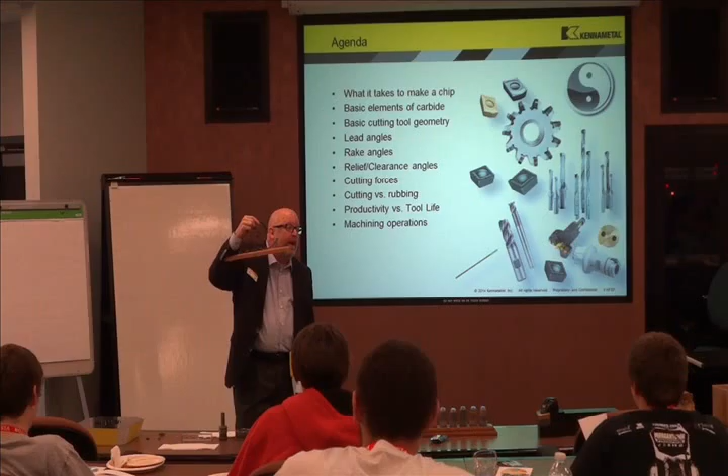I ask a lot of questions, okay? I do expect answers. If you answer, you will get a football. If you ask a question, you may get a football. If you ask a stupid question, you'll get a football. There are no such things as stupid questions, right? The only stupid question is the one that goes unasked. So I want you to ask questions. You may get a football if you answer a question. You will get a football if you fall asleep, right between the eyes. All right?

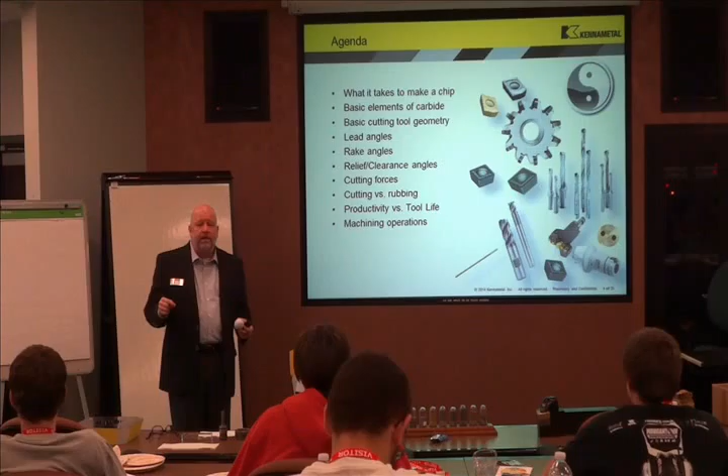The answers to all the questions are typically in your book or on the board. As I said, we're not actually following that agenda—that agenda is for our 2-day program. We're going to go through the first presentation and the second to last presentation today, because we just don't have enough time to go through both of them. So let's take a look at it.

We're going to take a look at what it takes to make a chip. As I said before, our customers make parts—you make parts, right? I could care less about your part. What I really truly care about is making good chips, and I want to make good chips, and I want to make a lot of them.

Because if I'm making good chips, I'm making a lot of them. Not only am I making good parts and a lot of them, I'm probably making money, which is important to all of us. We're going to talk about the basic elements in carbide. Carbide is the primary cutting tool. Are you guys using carbide or high-speed steel? Both.

Okay, we're going to talk primarily about carbide because carbide is what's being used primarily in industry today. We're going to talk about basic cutting tool geometry. The reason we talk about carbide and basic cutting tool geometry is because you need to understand how the cutting tool cuts.

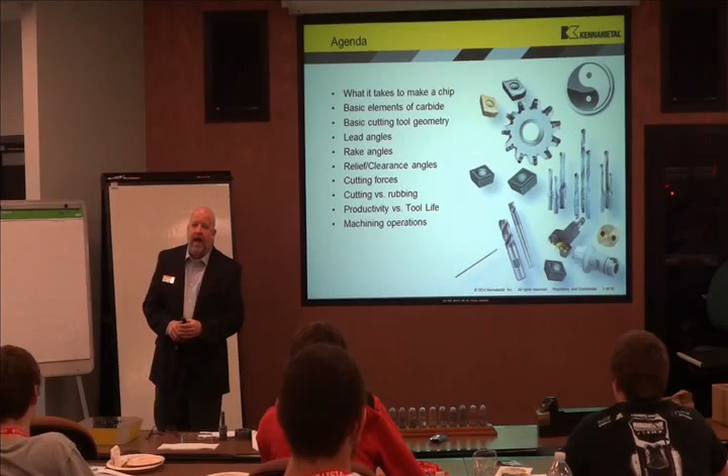Right now you're learning the fundamentals of machining. Pretty soon, are you learning programming as well? Yeah. It's okay to know programming, it's okay to learn how the machine works, but at the end of the day you've got to understand what's really happening where the rubber hits the road, or where the cutting tool hits the steel. And that's what we teach. The reason why we teach it, to get back to your question, is you can't learn this anywhere else. They don't teach it as much in tech school, they don't teach it in the 4-year engineering schools. That's why it's up to us to do it.

We're going to talk about cutting tool angles—lead, rake, and relief. We're going to talk about cutting forces.

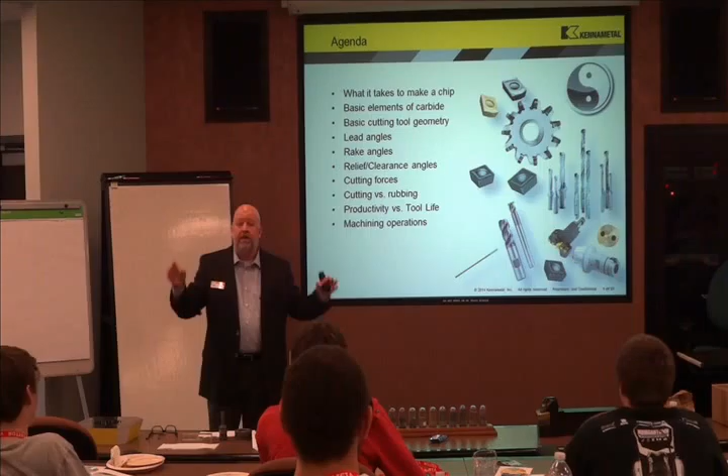How many of you remember Star Wars? At all. What did Obi-Wan tell Luke to do with the Force? Use the Force. Here's the truth: when you're cutting metal, there's going to be cutting forces. They're not going to go away. What we want you to know is how to use that force to your advantage.

Last but not least, we're going to talk about cutting versus rubbing. We're going to talk about productivity versus tool life. And then we're going to talk about basic machining operations.

Now, when you look at these pictures on the right hand of that slide, which one do you think does not belong? Go ahead. The yin and yang? Oh, I missed—that was a horrible throw. Hey, watch it. Okay, he got it.

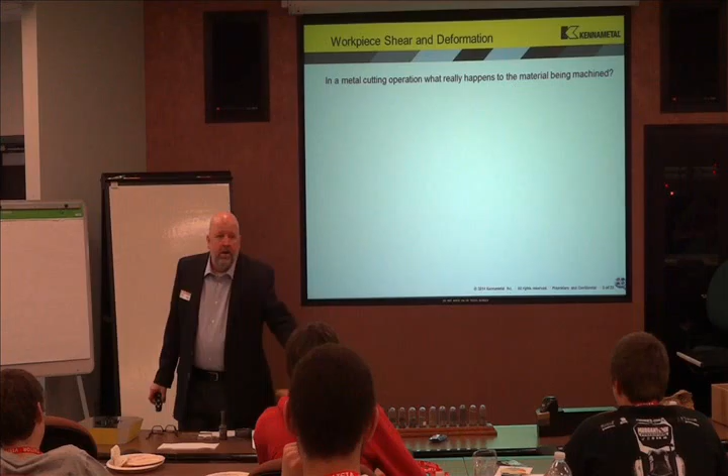The yin and yang—why do you think it does? What does yin and yang stand for? Does anybody know? Balance. It's actually yin and yang is good and evil, it's the balance. The symbol of yin and yang up here in the corner is the symbol of the balance of good and evil. And when you take a look at machining, the reason I have that up there is because in machining, it is always a balance between good and evil.

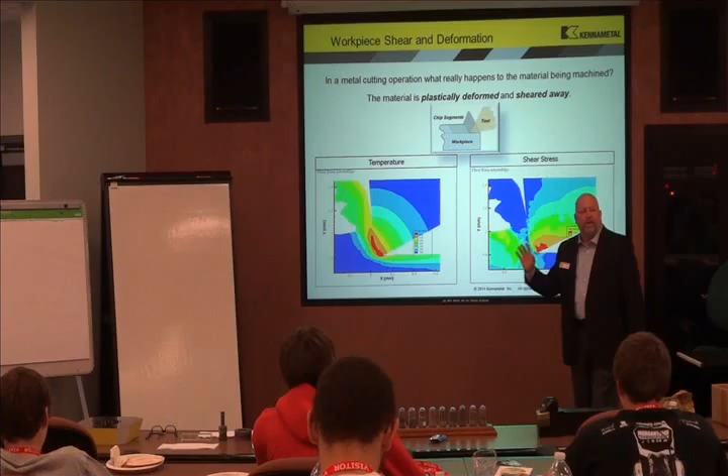If I change my edge prep on my cutting tool, there's a good thing and a bad thing. If I change my lead angle, there's a good thing and a bad thing. If I change the carbide grade that I'm using, there's a good thing and a bad thing. It's incumbent upon you to figure out what the good things and the bad things are, because that's part of what you're going to do when you troubleshoot machining operations as you get out into the real world. So in reality, this is the most important thing.

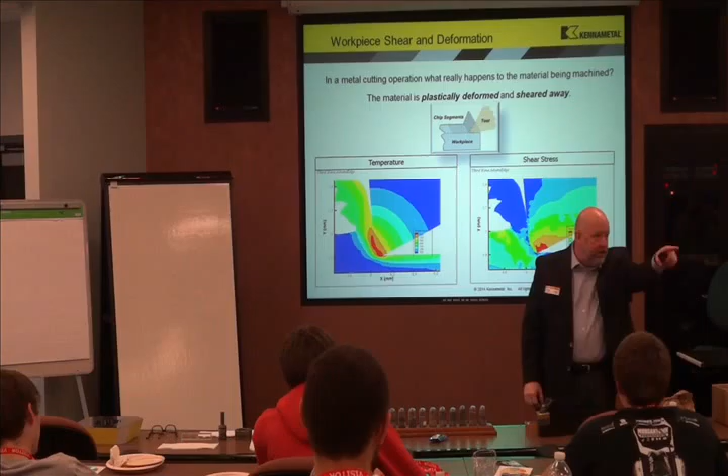Before we get started, it's important to understand, in a metal cutting operation, what's really happening to the metal being cut? What's really happening to the metal being machined?

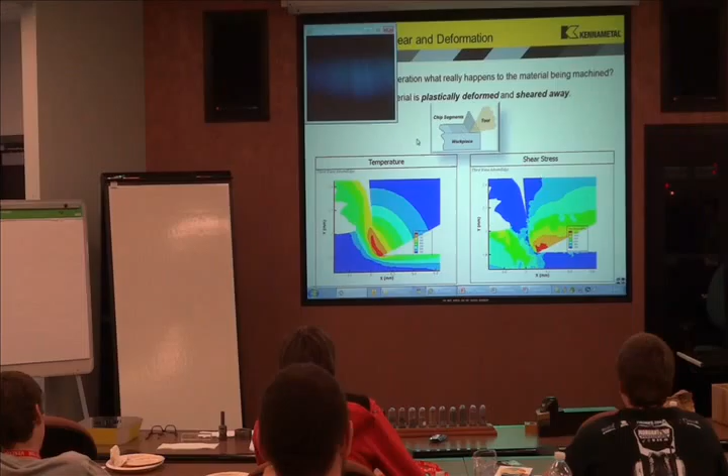Anybody know? By the way, the answer is in your book. They teach them to read at that school. They don't? Okay, just text. You know how to text, right? You can text me the answer, right?

In a metal cutting operation, what's really happening to the material being machined is it's being plastically deformed. Sheared away is one part of it. But to make this chip, we must first plasticize the material, and then we shear it away. At the shear zone, where the cutting tool hits the metal, it is 1200 to 1400 degrees Fahrenheit.

How many of you knew that? So what we're actually doing is plasticizing the steel, and then by the feed force, we push it away and shear it away. That's what's really happening. This is my cutting tool, this is my chip, this is my part. Right here where the cutting tool hits the part, that's 1400 degrees Fahrenheit.

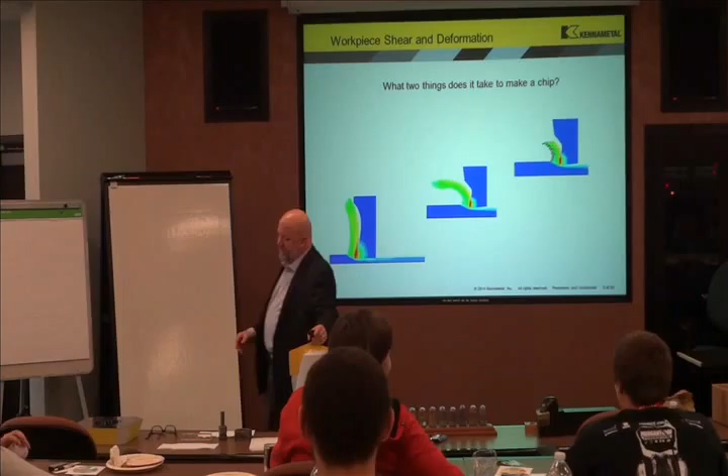Pass this around. When you look at the outside of this chip, that's the side rubbing what I call the rake face of the cutting tool, and we'll talk about that. The inside of the chip you see is undulating. See the bottom of this chip coming off? If you look at it, see how there are segments, those lines? That's really what's happening.

That's sharp, just be careful guys. Yeah, don't cut yourself. Yeah, you could cut yourself. I would prefer you carry it by the wood.

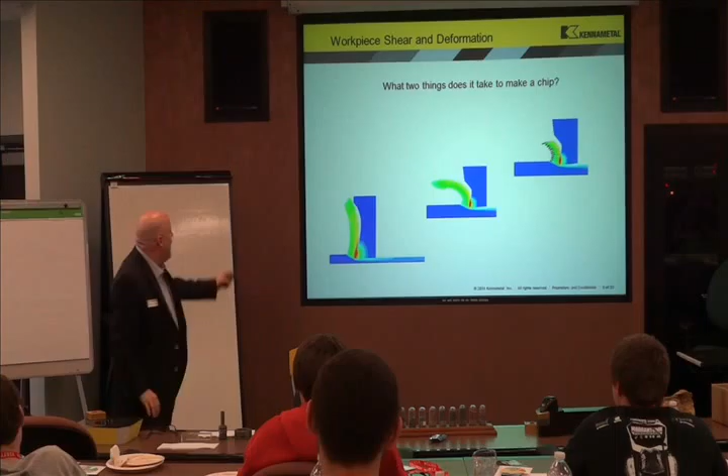So, in a metal cutting operation, we're plastically deforming and shearing away the material. How many of you like butter? Seriously, I like butter, you can tell, can't you? Now, when you take butter...

I'm not sure I like your answer. All right, yes, I do like butter. My doctor doesn't like it, but I do.

When you take the butter out of the refrigerator, is it easy to cut and put on toast? No, it's not, it takes a lot of force, right? And when you try putting it on your bread, it rips up the bread. I don't keep my butter in the refrigerator, I keep it in the cupboard. I take my knife out and cut it, it cuts real easy, doesn't it? It makes it easy for me to eat more.

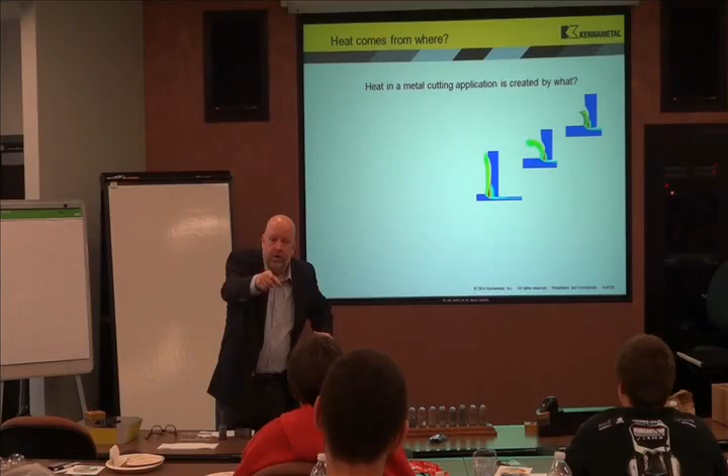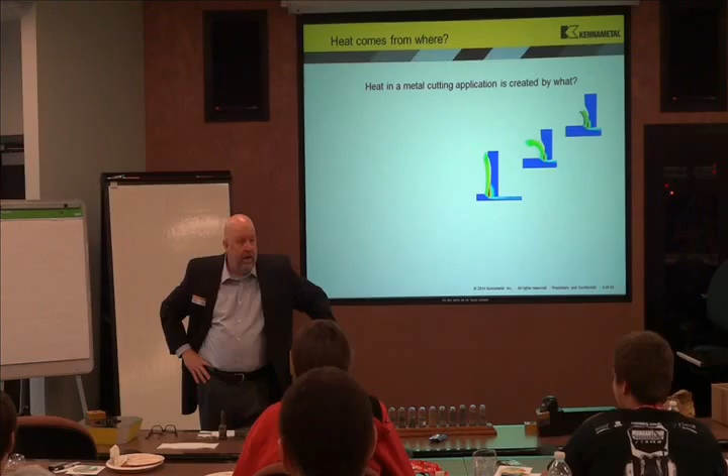Same thing's happening to the tool. Think about it. If I don't have enough heat at the shear zone, it's going to take more force or pressure. If I have too much heat at the shear zone, what do you think is going to happen? Not only the part, what else is it going to melt? My cutting tool. So what two things, if I'm plastically deforming it and shearing it away, does it take to make a chip? Heat and pressure. It takes heat and pressure at the shear zone.

Now, how do I create the heat? It's friction. If you hold your hands together and rub them, what happens? You start getting temperature, it starts getting warm. So how do I create that friction? Well, the tool's running across this part, but think about it: the rotation of the tool or the rotation of the part, depending on whether I'm turning or milling.

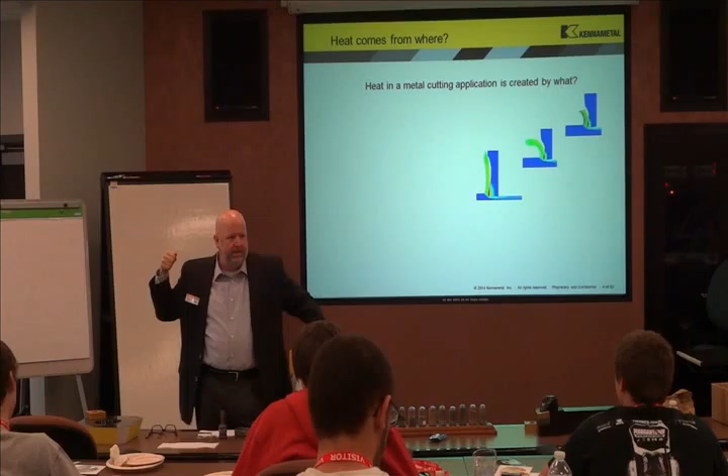Make sense? Now, how do I regulate the amount of heat? Because remember, the amount of heat I create at the shear zone is just like Goldilocks and the Three Bears, you have to have surface footage, and it has to be the right surface footage. How many of you really don't understand surface footage? How many of you, all of you, understand surface footage? Really? There are teachers in here, they can't see.

No, that's right. How many of you use toilet paper? How many of you use toilet paper? You're not going to raise your hand?

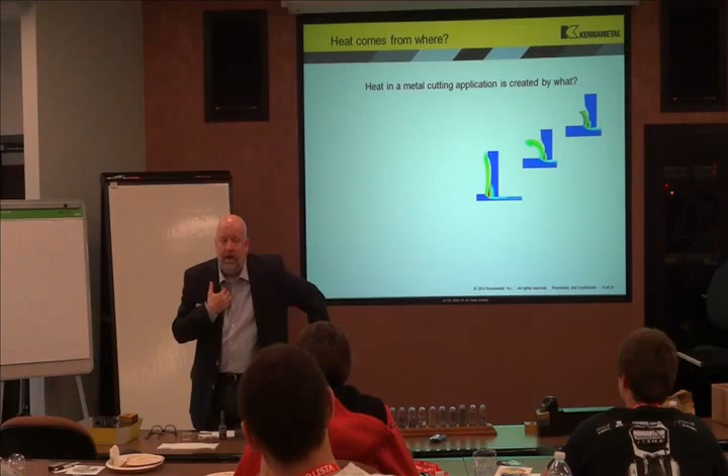All right, here's the best way if you're ever trying to explain surface footage. Think about it: if I had a small roll of toilet paper and a big roll of toilet paper, your teacher back there is holding it on a broom handle. If I walked 100 feet in 1 minute, what was the surface feet of both rolls? The small one and the big one?

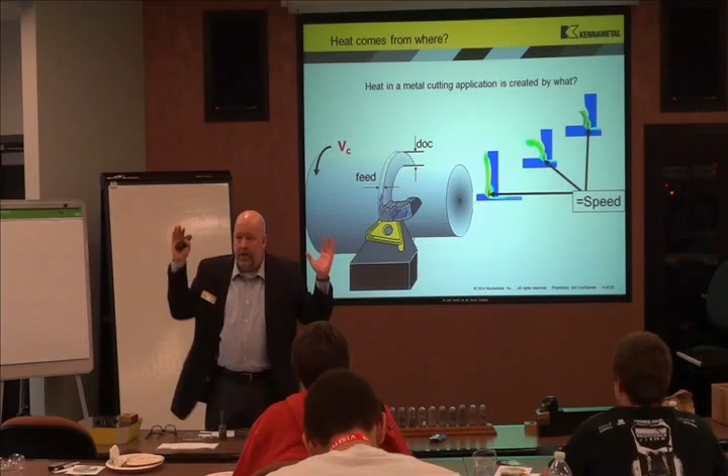100 feet. Were they doing the same RPM? No. Which one was going faster, the smaller or big one? Smaller. Why? Because it had a smaller circumference, and it had to go faster to get the same surface ripped off of it. It's all about having the same amount of material crossing your cutting tool in a fixed amount of time. That is how we regulate the heat.

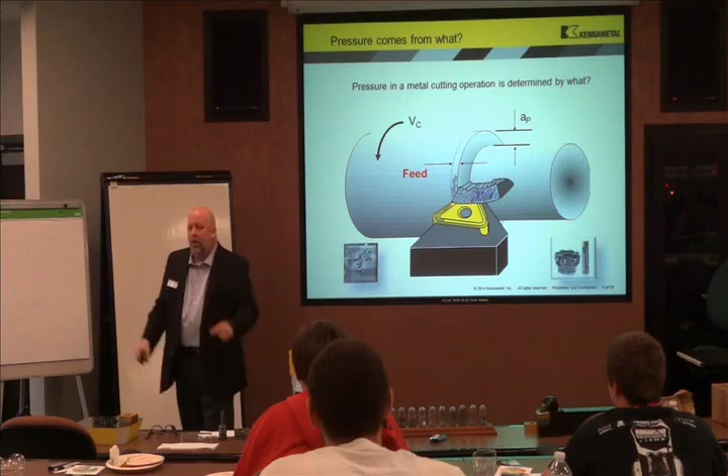Do you run the same speed, surface feet per minute, for all materials? No. For every material, there's a thing called a machinability rating. It's more complicated than what I'm going to say, but to me, what that machinability rating means is the amount of heat and pressure it takes at the shear zone to plastically deform and shear away that chip. That's really what it's all about.

Make sense? All right, so a lot of times in industry you won't see surface speed, you'll see velocity cutting. Because in the United States, it's surface feet. In Europe, and honestly in America today, there's a lot of European manufacturers, a lot of people are using metrics on all their prints and all their programs. So you have to start learning both.

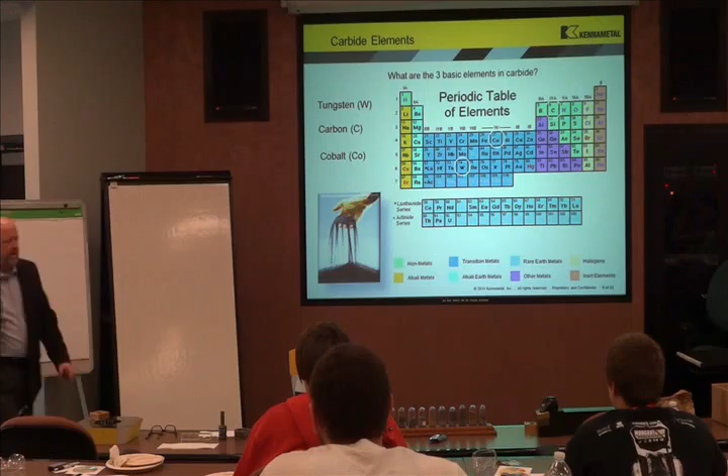So we regulate the heat by the speed. How do we regulate the pressure? By the feed rate. It's all about the feed rate. And that's either in inches per minute in milling, or inches per revolution in turning.

How many of you remember this? Who was laughing? You don't like it. I hate it, I hated it too.

Now I teach it. This is why I went into tech school instead of onto the chemistry track. You got one, right? All right, this is the periodic chart of elements, and the reason we show that is there are three basic elements that make up carbide. What are they? Cobalt is one of them. Tungsten's another one, and carbon's one of them. So you've got carbon, cobalt, and tungsten.

Now, hold on, if it's on the floor. Is it on the table? Oh, you did. When I think of carbide, what makes it up? I actually think Rice Krispie treats. How many of you like Rice Krispie treats?

All right, this is easy to understand with carbide. When you think about carbide, think about a Rice Krispie treat. Because what we do, there are two elements in carbide that we combine to make the Rice Krispie, or the hard wear-resistant molecule in carbide. What two elements do you think they are?

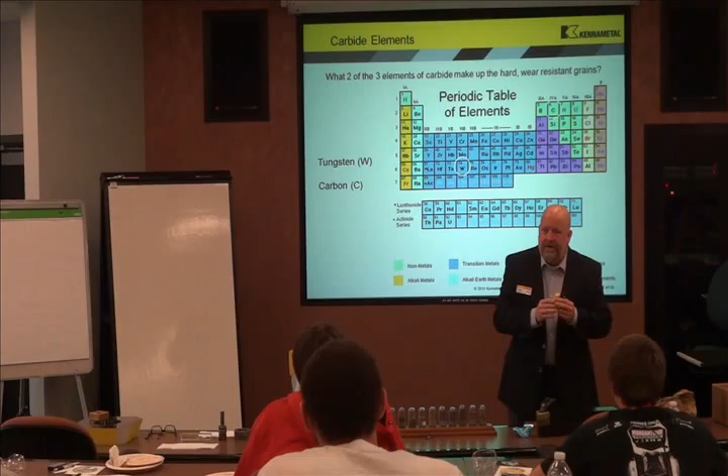He's getting all these right and he doesn't have his book open. Now he's stumped. What do you think they are? Tungsten and carbon. Think about carbon: what happens when you burn toast? It turns black. What is that black stuff? It's carbon. If any of you watched Star Trek in the old days, we are nothing more than carbon-based beings. If you burn me up, what am I going to turn into? Carbon. Everything in the world is made out of carbon.

Carbon, and then we take tungsten. We take carbon and tungsten comes out of this rock. Actually, if you look at that gray line going through this rock, that's tungsten, primarily mined in China. You ask why we manufacture there? Because we need their tungsten. It's a symbiotic relationship, right? Yin and yang.

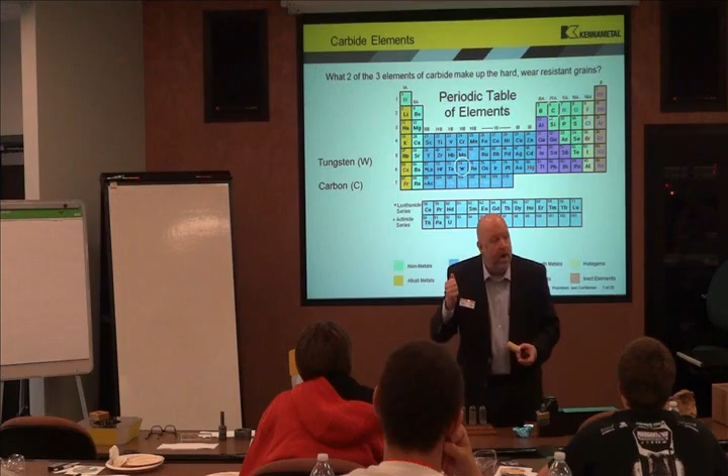So what happened to my Rice Krispie treat? So I take the carbon and I take the tungsten, I make the hard molecule, which is the Rice Krispie. It's the wear resistant part. Then I take cobalt, and another word for cobalt you're going to hear is binder. You will hear that as the years go on. It's called a binder, it holds everything together. It's the marshmallow.

Now, real quickly, there's two types of carbide: wear resistant and tough. You can't be both. Because if I'm really wear resistant, it's a hard piece of carbide. What's one of the hardest materials? Diamond. What's another hard material? Is glass hard?

It's right up there with diamond. Diamonds are a little bit harder. Now glass is very, very hard - the harder it is, the easier it breaks. It's also very, very fragile.

But if I took a cutting torch to a piece of glass, it would melt, but it would take a long time, right? So hard carbide is very, very wear resistant. It can take a lot of heat. But if I hit it with a hammer, it's going to break.

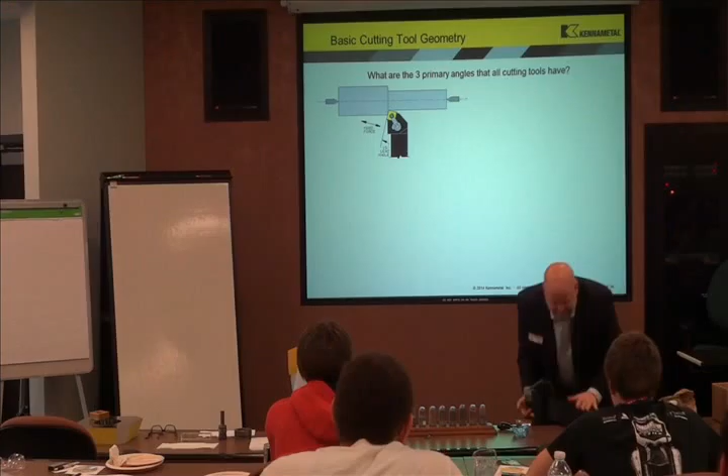So what do I add more of, Rice Krispies or marshmallow, to make it tougher? Marshmallow, or cobalt. You'll hear people say, I add more cobalt, I make bigger grains of Rice Krispie, I get a tougher grade of carbide.

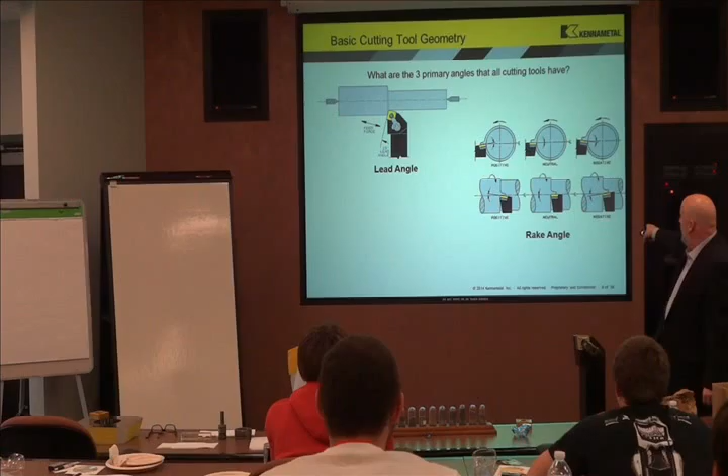When I say tough, I'm thinking about rubber. It can take a licking - interrupted cuts, a lot of vibration, a lot of movement in the tool. It's not hard, so it can't take a lot of heat, but it's very, very tough.

So tough carbide, you have to run slower. Hard carbide, you can run faster. You always want to run the hardest carbide grade you can without it breaking, because that means you can run as fast as you can, which is the most efficient.

It's all about how many parts can I put on the floor in a minute. That's all I care about. That's all your boss is going to care about, right? So that's the basic idea of carbide.

All right, now let's get into cutting tools. Every cutting tool, whether it be a drill, whether it be a turning tool, a milling cutter - and for some reason I have no milling cutters - no matter what kind of tool it is, a drill, a mill, a milling cutter, a reamer, doesn't matter, all cutting tools have three angles.

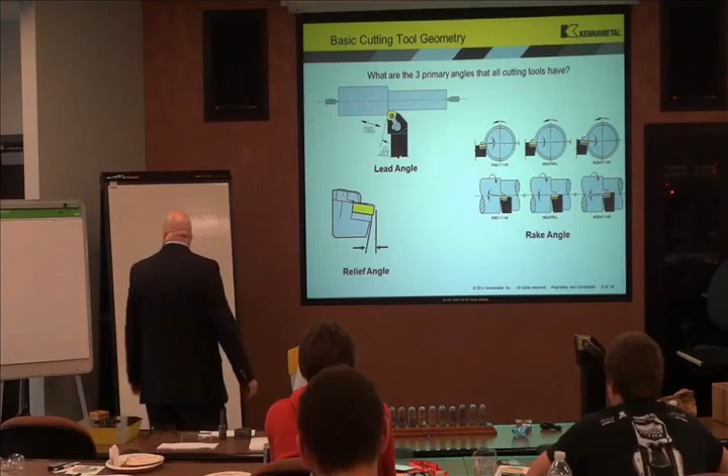They are the lead angle - now this is for turning - it's the rake angle, and it's the relief angle.

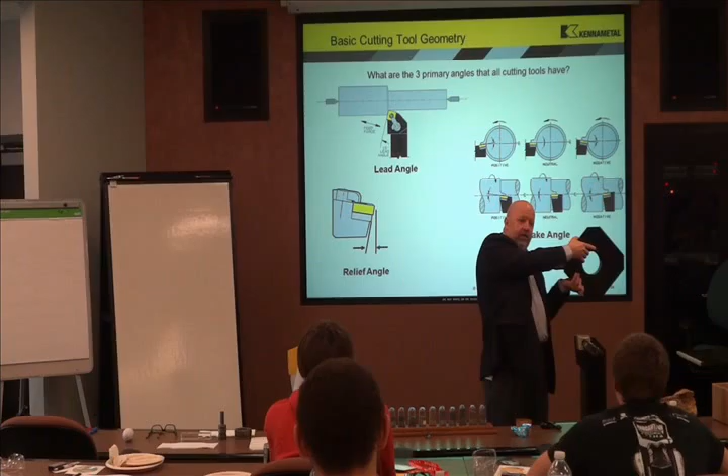Now when I look at this turning tool - this is a turning tool and I've got a chuck and I'm machining a part - which way am I feeding this tool? This way or this way? This way, right? All right, so this would be the lead angle. It's the front, it's how the tool attacks the part.

And you can change that lead angle by changing this tool holder - different types. Or if you're using manual machines, you just turn it in, you just change it in the compound. But when you have a CNC machine, you actually got to get a different holder with the pocket milled in differently. All right? For a drill...

Half of this point is my lead angle, because this is what hits the part first. Make sense? If I had a milling cutter...

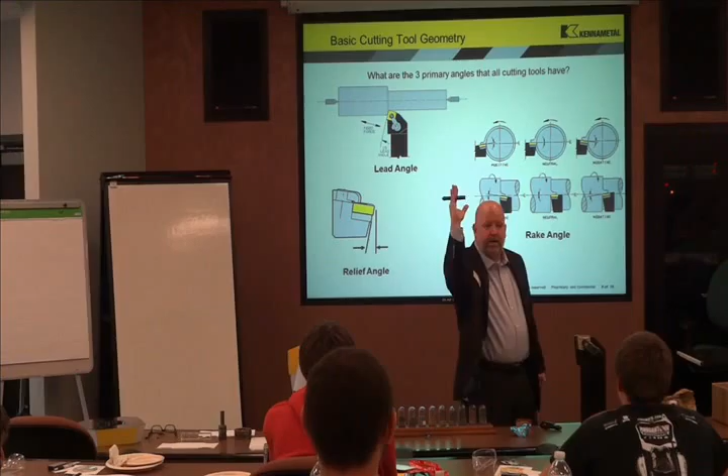Pretend I'm the milling cutter, and this is my insert, right, out here on the periphery. If I'm milling in this, my spindle's up here, like a Bridgeport. I'm milling in this direction - this would be my lead angle, right? That would be 90 degrees.

That would be a heavy 45-degree lead angle, right? That would be a negative 40 - well, we wouldn't talk about that, I kind of did the wrong thing there. So every cutting tool has a lead angle.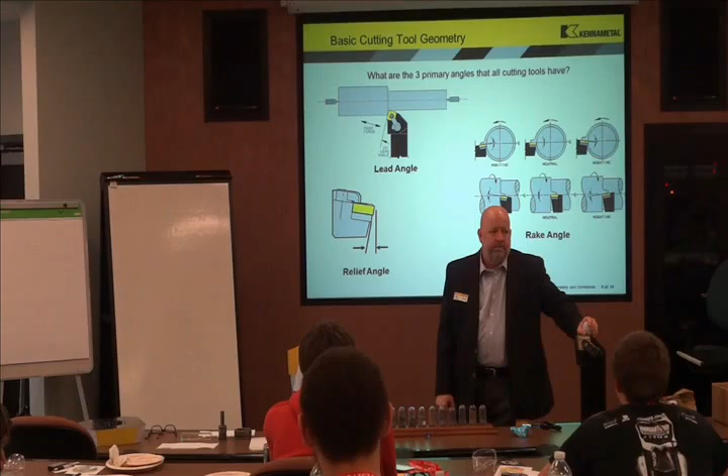Why do I care? Why do I care how efficient the tool is, it's not that. One of the things that I said too - what did Obi-Wan tell Luke to do with the Force? Use the Force. How do you know how to use the Force?

Cutting forces are always perpendicular to the cutting edge, 90 degrees - that's what perpendicular means. I can't change the amount of force being created, but I can change the direction. If this is the direction of the force, that's perpendicular to my hand, right?

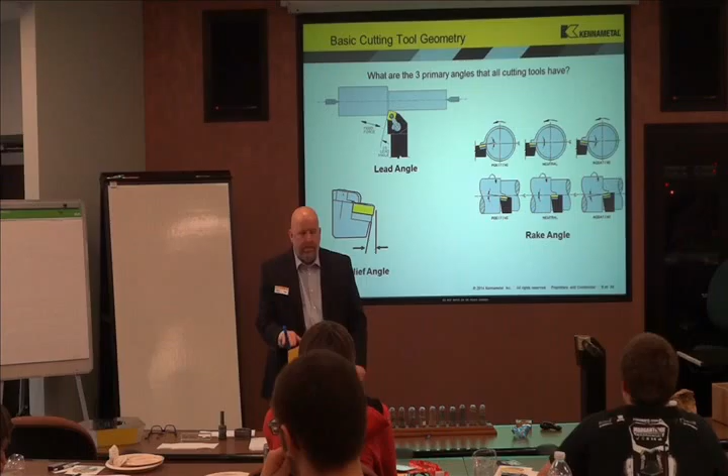If I change the direction of this on this turning tool, right now that force is going this way. If I change that by changing my compound rest in the manual machine, or this tool holder differently, I can change where those forces go. Why do I want to do that? I want to push them to where my setup is most rigid.

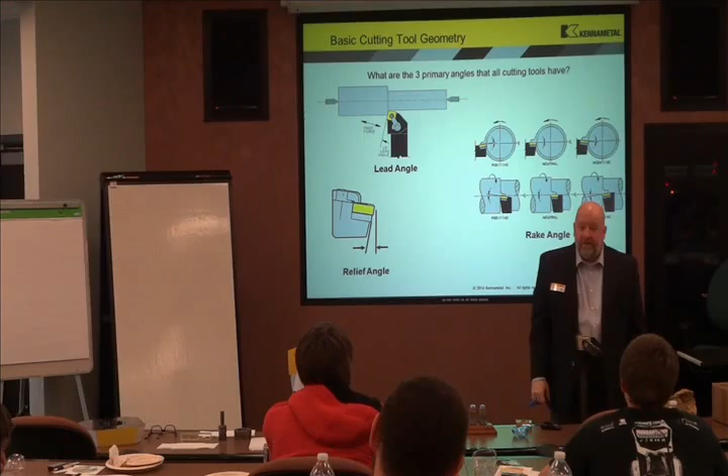Okay, I can do that with this. In a drill, I'm going to have to change the drill point. In a milling cutter, if it's indexable, I'd have to get a different milling cutter to change that angle. But I might want to do it to change things.

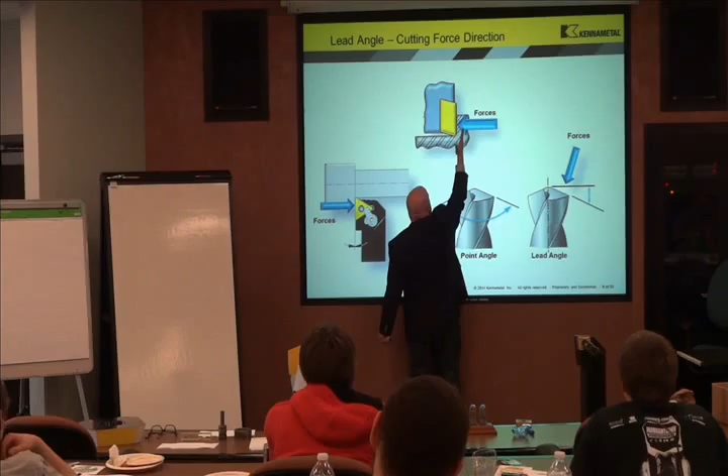If I'm hanging my cutting tool out this far, what's going to happen typically? It's going to chatter. You know how to stop that? I can only make it so rigid, right? But if I take that cutting edge angle - let's say this is an end mill, and it's hanging way on down - that cutting force is perpendicular to that cutting edge, right? But what if I take that cutting edge and I lay it out flat?

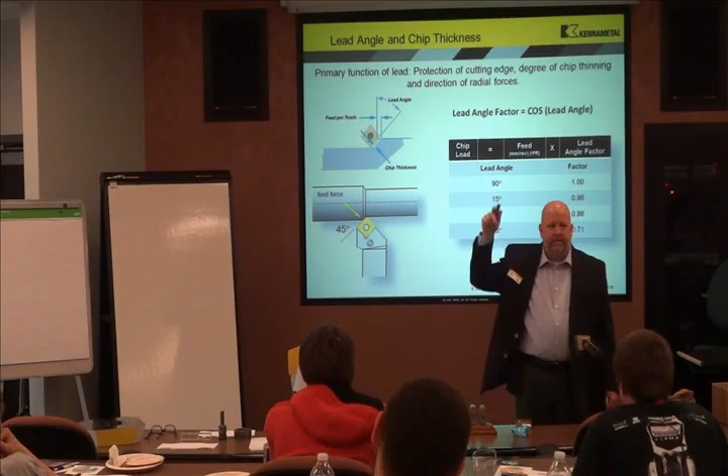All those cutting forces are going up into my spindle and down into earth. They're called high feed cutters. By changing the direction of that force, I can eliminate that chatter. I can't take a big depth of cut, but I can move really, really fast because I don't have any chatter.

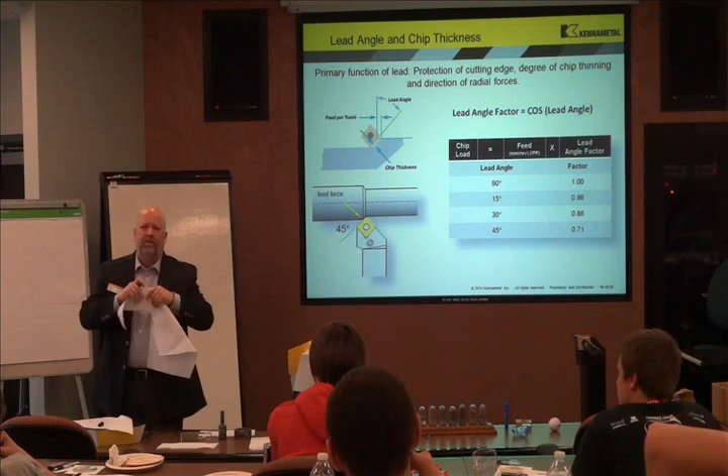Cutting forces are always perpendicular to the cutting edge. This is a 0-degree turning tool, perpendicular. Again, my lead angle on a drill is half the drill point, and it's perpendicular to this cutting edge. If this was a milling cutter, rotating this way, again, perpendicular to the cutting edge. If I change that angle, I therefore change the force direction.

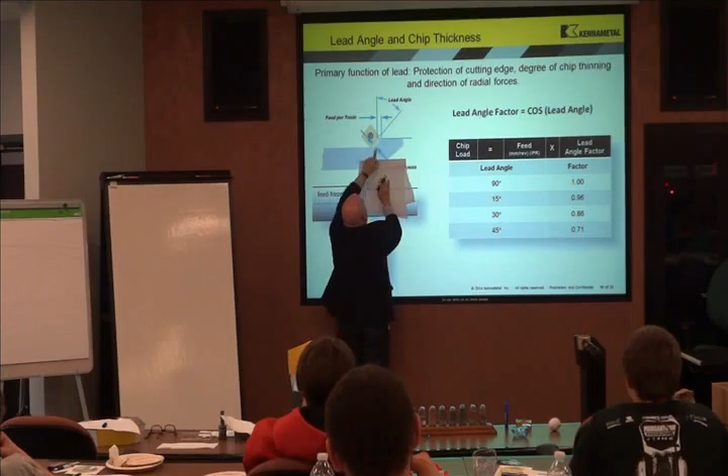Here's something else they don't teach all the time. When I change that lead angle, not only do I change the direction of the force, I actually thin the chip.

How many of you are really into geometry? That's the one thing I could actually get. I couldn't get algebra, stunk at it. But geometry, because there's pictures, it's better with pictures, I can actually get it. Let me show you, I will illustrate what I mean.

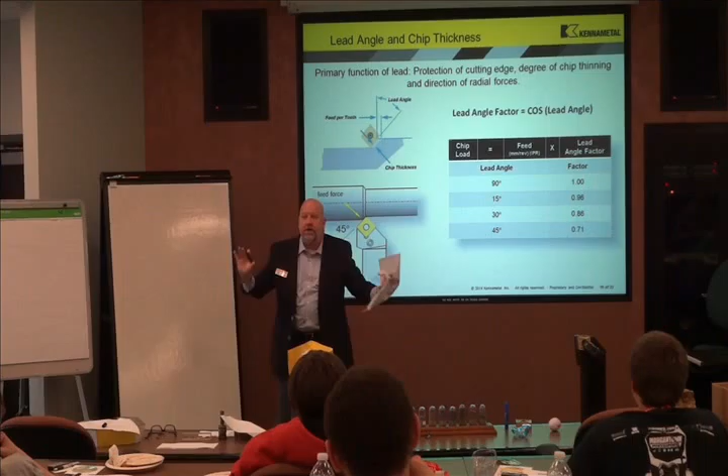Don't try this at home. Change to a cheaper paper. Okay, I can do it that way. Normally, the commercial would say this is a professional doing this, but I can't say that. Yeah, don't do this at home. This is the time you might want to turn off the camera.

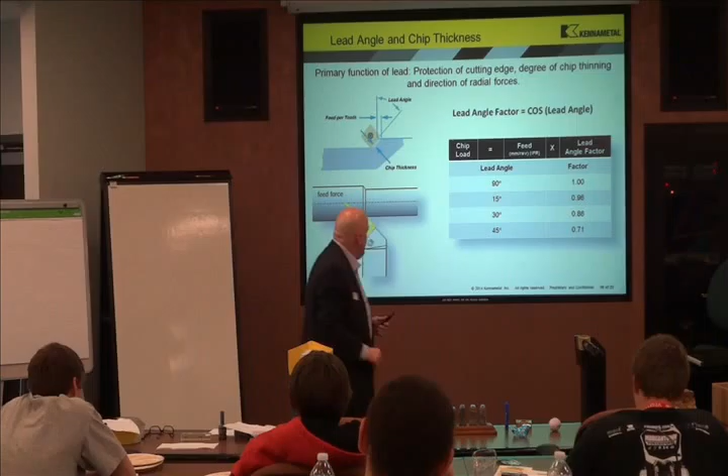No, leave it on. All right, so if I look at this milling cutter right here, if this was a square shoulder, and I fed this 10 thousandths per revolution, how thick would my chip be? 10 thousandths if it had one insert. Now, if this is 10 thousandths, and this is a 45-degree lead angle, now look how thick my chip is.

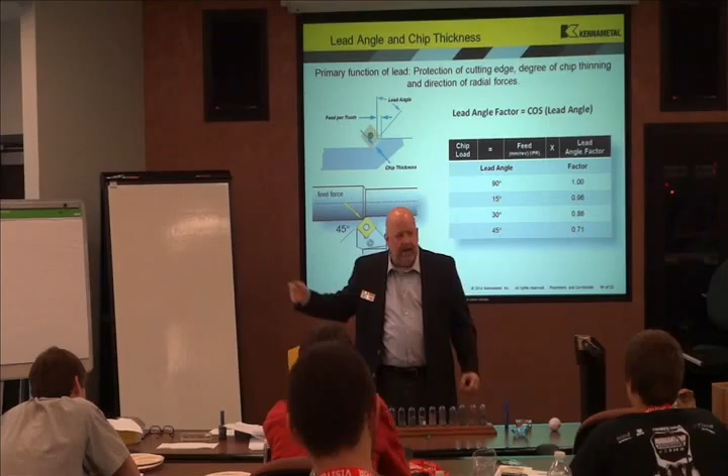It's geometry, it's trig. When I change that lead angle, the total area of the chip is the same. It's going to take the same amount of force. The total amount of material I'm taking is the same. But the chip gets thinner.

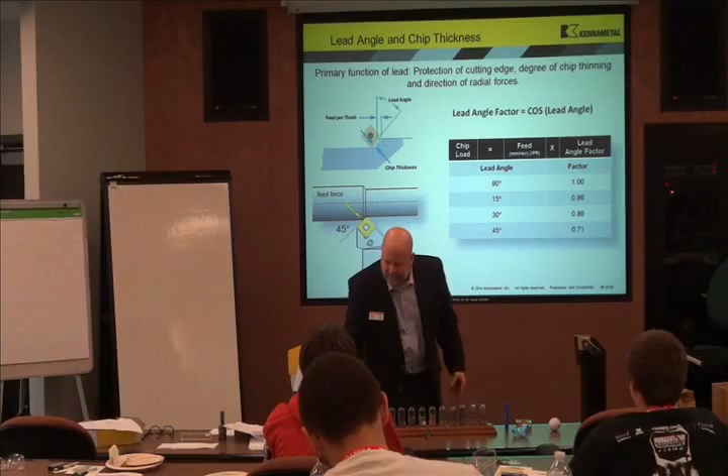Why do I care? I change the force. It's all about money. If I thin the chip, you think I can feed it a little harder? Because now my forces are, instead of being totally on my end mill trying to push it to the side, if I change the direction so it's split between the spindle and the ground, I'm more rigid. Plus I got a thinner chip I can feed faster.

Let me ask you now, what do you think it takes to make a chip? I said it on the first two slides. One of them is heat and pressure. What two things wear out carbide? Heat and pressure. Remember yin and yang?

Can't be too hot, can't be too cold, it's got to be just right. Where do I want the heat to go? Into the chip. In order for it to go into the chip, I've got to have a thick enough chip for it to go into. If my chip is too thin, what's going to happen? It's going to go into the part, and the part's going to grow. You're going to get yelled at by the inspector because when it goes into the air-conditioned inspection room where he works, it shrinks. It'll be undersized.

Where else does the heat go? Into the tool. What two things wear out carbide? Heat and pressure, so it's that yin and yang. As you change your lead angle, you can change your feed rate because you have a thinner chip.

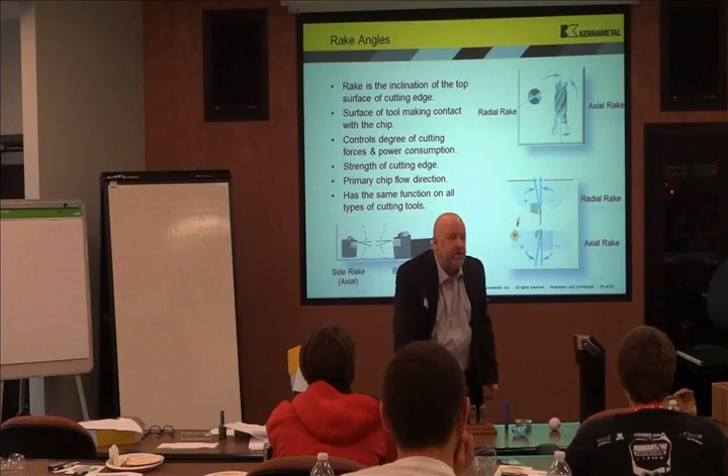Now, there's a thing called the rake angle. If this is my turning tool holder, now, how many of you like this chip?

Why do I not like this chip? This is a dangerous chip. It's nice and thick and nice and wide. It's a big chip, but it's also unruly. You can't manage this chip. What shape do you want your chips to be?

6s, 9s, or C's. And I'm going to tell you something too, you don't want them real tight, guys. Everybody thinks real nice tight ones are good. No, you want those chips to be as open as they are before they start doing this, because if it's too tight, it's too much heat and pressure and you're wearing out your tool. And every time you have to index your tool, here's the truth: it's not about the tool cost.

Your time is worth more. That machine time is worth more than the tool.

If you're making an engine block, what percentage of the cost of making that engine block is tooling? What do you think? 5%? How many think he's too high? Anybody? How many think he's too low? What do you think it is? 8? Anybody else want to try? You say 10 now. You're conflicted, aren't you? You need to learn to stick with your gut, because you were close.

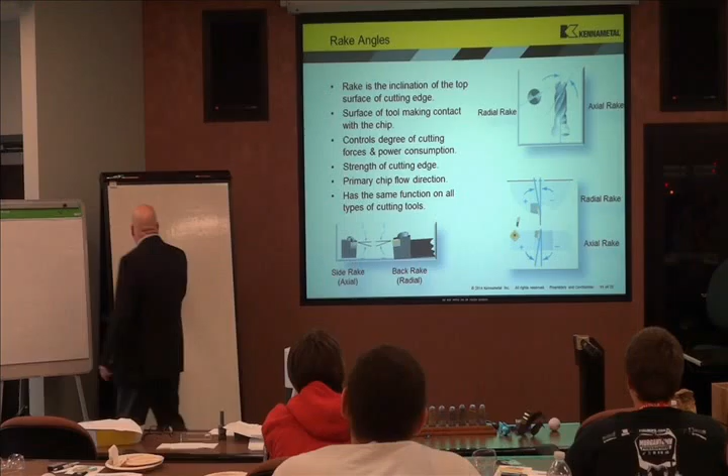So my point is, when you're wearing these tools out, you don't want to wear them out too slow, and you don't want to wear them out too fast. You want to be just right. Because it's not about the price of the tool, it's about the price of making parts and having the machine running.

On this tool, if I was turning and going into this direction, the rake face is the surface of the cutting tool that the chip rakes across. Make sense? So if you looked at this drill, it would be here, right? On an end mill, it would be on this flute, right?

Because that's what's cutting, so it's this way. On the drill, it's this way because the cutting edge is up here, so it's here. But if it was a mill, it would be here, since I was cutting on the side. Make sense? Now the rake angle controls the strength of the cutting edge,

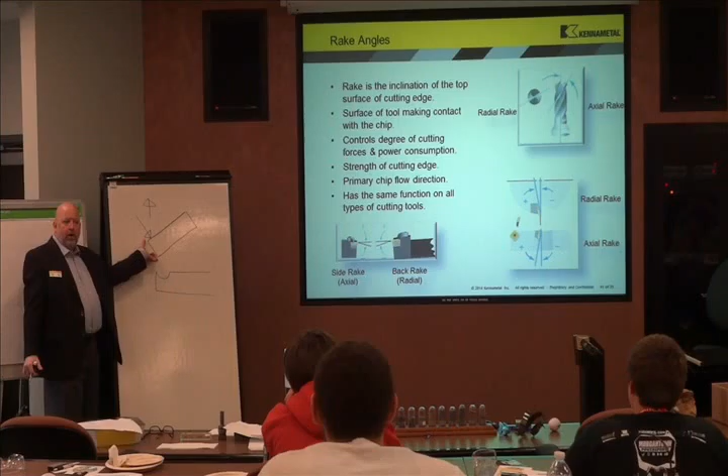and it controls the amount of pressure or cutting forces being generated. I've got 2 choices. You've seen tools that are presented, and this is an exaggeration. That's a negative cutting edge if I'm cutting in this direction. Okay? Or you'll see a cutting tool that will be like this. That would be considered positive, right?

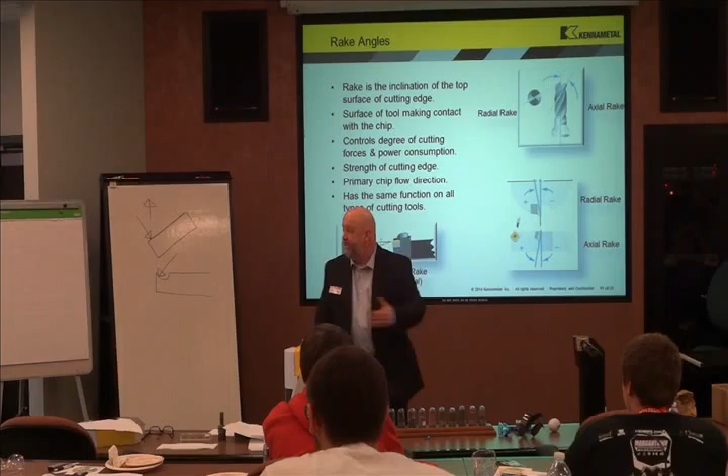All right, which one's stronger, the one on the top or the bottom? Is this stronger than this? How many think this is stronger? Raise your hand. Okay. How many think this is stronger? Oh boy, we got some work to do.

This is actually stronger. Cutting forces are always what? Perpendicular. My cutting forces on this tool are going this way. That's nice and thick, it's strong, but it also creates a lot of force. Cutting forces are always perpendicular.

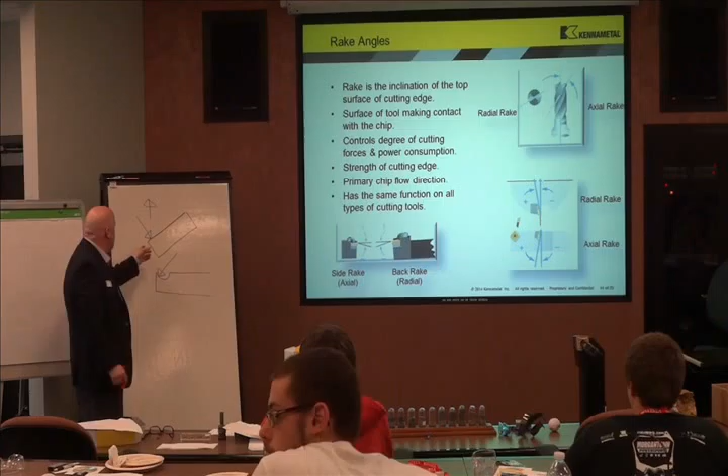What's behind this? Now which one do you think is stronger? When you look at it that way, it makes sense, doesn't it? This one is freer cutting for your soft, gummy materials. You want that positive cutting edge to shear the material off. For your harder materials, you need more strength, you want to push the material off.

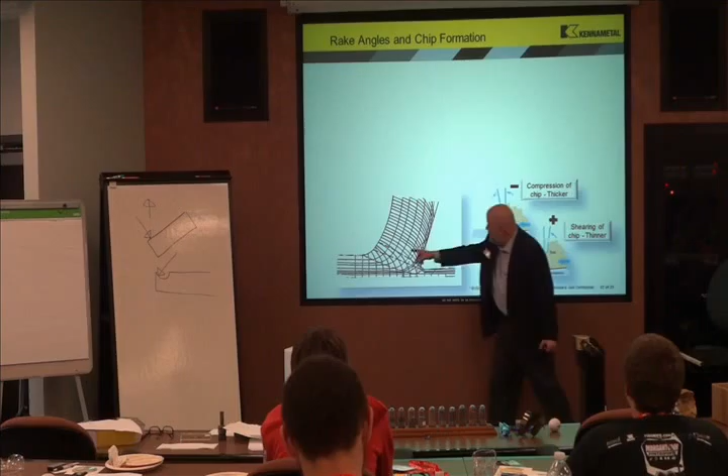Make sense? Okay, guys in the first row, you guys with Dave, remember what he said about how carbide likes to be, in tension or compression? Compression. So on your top, you're squeezing that carbide together. This is in a state of compression. This is in a state of what we call transverse rupture.

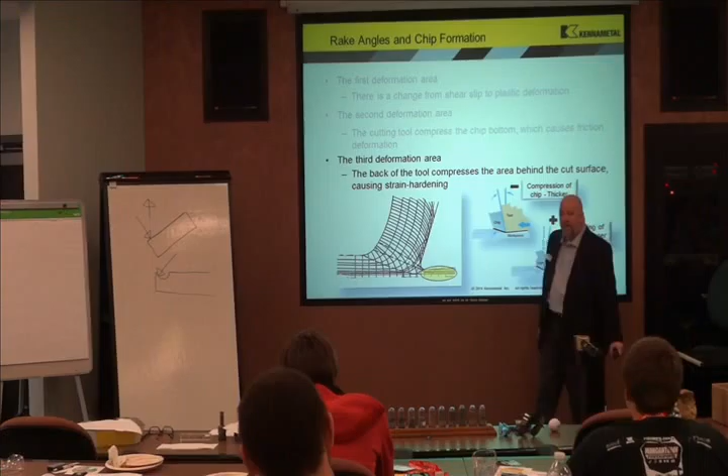It's a fancy term that carbide doesn't mind being like this. It doesn't like being like this, if you've got something underneath it supporting it. Now sometimes you've got to do this, sometimes you've got to have something like this for aluminum. If you try and push aluminum, it's going to push back. It's not going to cut very well, it's going to smear and be nasty.

So depending on the type of material, you have to change the type of rake angle you have. I've got hard and tough carbide. Now I've got different rake angles, and I've got different lead angles. Lead angles, where the force goes, and this is how I shear the material.

How am I doing, boss?

So when we look at it, if this is a cutting tool, this is my chip. What's happening is there are three shear zones. Here, this is where the material is plastically deformed and sheared away. You saw it in the movie, right? Here's where it starts to slip on the rake face of my cutting tool. This is negative, this is positive.

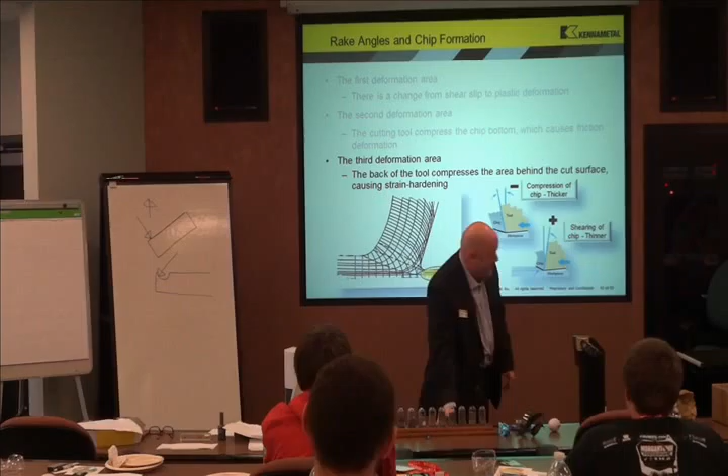Make sense? Now here's the part you may not understand. When your cutting tool is coming across the material, it's actually saying 'I don't think so' — it's backing out of the way. I don't care what kind of material it is, all of them move somewhat. Soft gummy materials, they call it modulus of elasticity. It's a fancy word that means it just moves out of the way and then comes back.

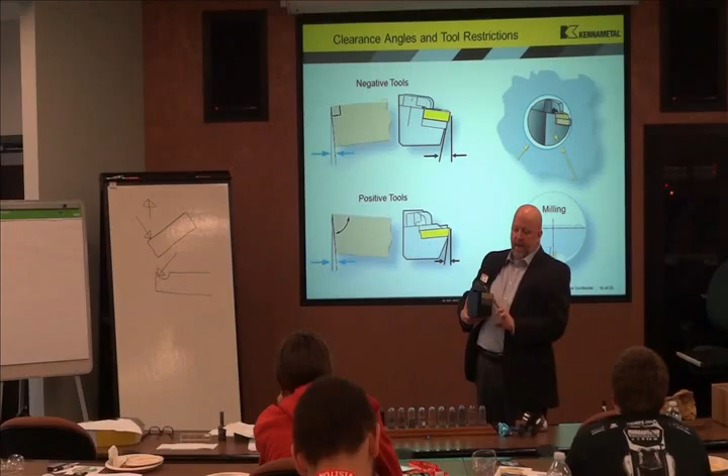Now, what's your name? If I want to beat up Jamie, and he keeps dancing around and moving out of the way, how do I get a punch in? I grab hold of them and pull them in, right? So if my material's moving out of the way, what do you think I want, this or that? The bottom one — I've got to pull it in.

Soft gummy materials, it makes sense? Now, if I've got a material that's real hard, it's putting a lot of force on my cutting tool, causing it to want to break, I go to this one.

All right, now carbide — what two things does it take to make a chip? Heat and pressure, but it takes a certain amount of heat and pressure, right? If I do this, eventually my hands are going to get what? Hot, blistered, warm. I want to be able to control the amount of heat and pressure at the shear zone.

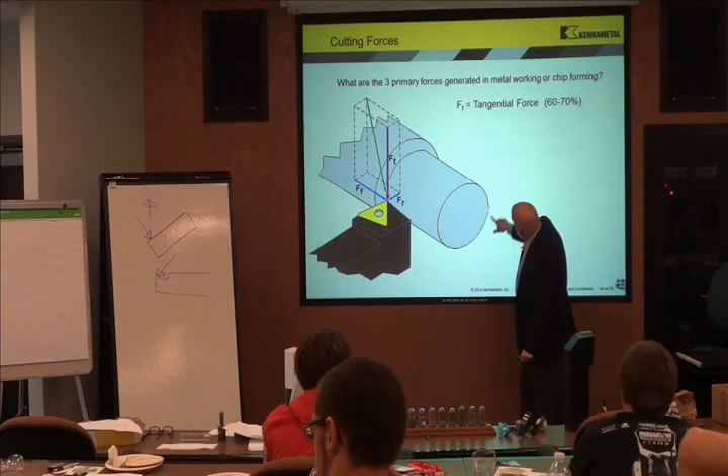So the last angle is what I call clearance. And on this tool, if it was sitting this way — you can barely see it, but this tool is tilted 5 degrees in that pocket, which means when I'm cutting, this edge is tilted 5 degrees. So it's got clearance so it doesn't rub.

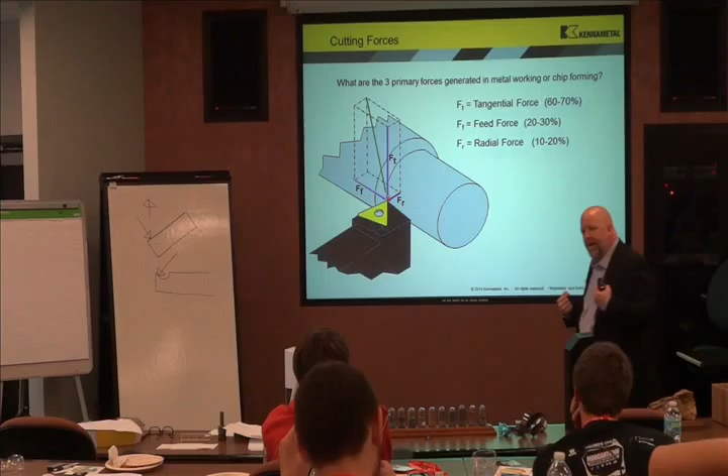If I look at this drill, I'll take the insert out. If I'm holding this straight, you see that this edge is tilted down right here. That's so this edge does not rub — this cuts right here, that's the clearance on my drill. All cutting tools have it so they don't rub, because I need to be able to control the amount of heat and pressure at the shear zone.

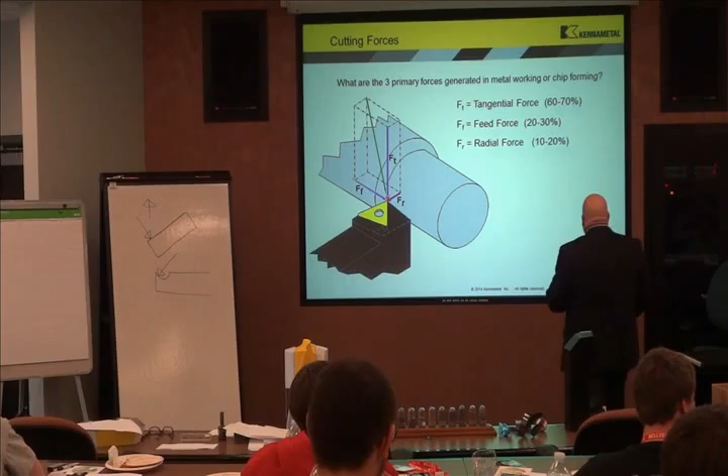There are 3 primary cutting forces. Tangential — in turning, where my part is turning, I've got a major amount of force on the rake face or top of the cutting tool. It's causing my tool to want to deflect. That's 70% of all the forces being exerted. 20 to 30% of my forces are feed. And the smallest force is radial, the part trying to push against the tool.

Now, of those 3 forces, which one's the biggest pain in the butt? You'd think it's tangential because it's 70% of all forces, but it's not. Now you went the other way — it's radial.

If the cutting tool and the part are pushing away, what eventually happens? They come back. They push away and they come back, they push away and they come back. What's another word for that? Chatter. Chatter causes bad finish, it causes size control issues, it causes chippage.

You were thinking something else, get that off your mind. It's for — oh, chatter? Where we work, you got chatter? There's ways to check it, there's ways to fix it. Oh, we can't do that. There's ways to fix it. Too much time? Well, it takes time to fix, yeah.

Well, here's the truth — you guys may be too young to remember this. There was a time that Japanese companies were known for better quality cars than we were. When was it, during the 70s and 80s? Late 70s and early 80s, I wouldn't buy an American-made car, because quality stunk — Japanese was better. Why do you think they were better? Actually, it's because of the acts of two Americans, Deming and Juran.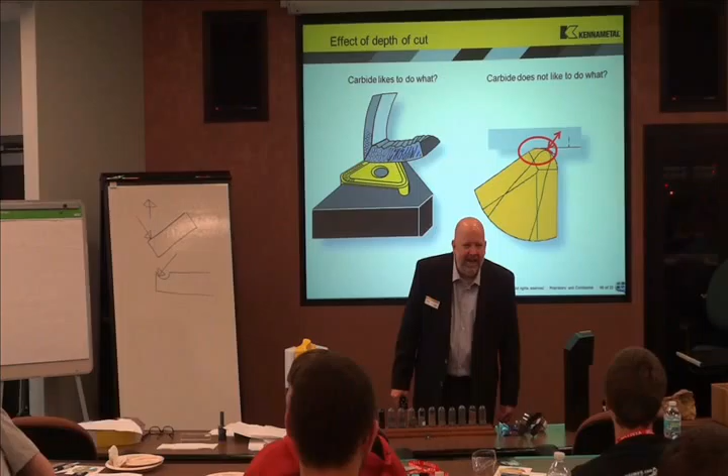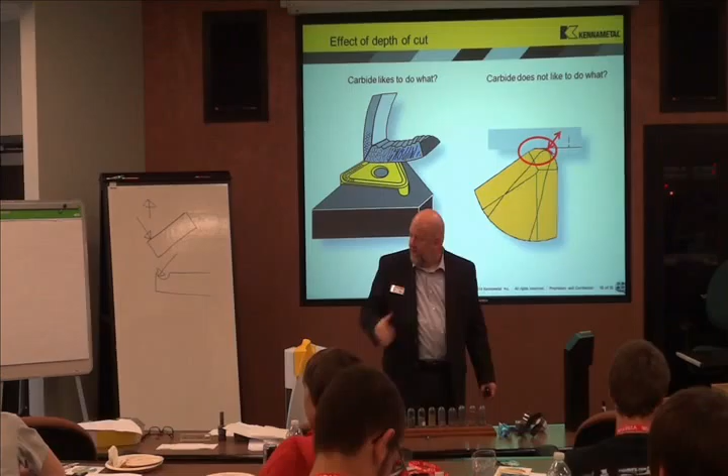They were quality gurus, Americans. After World War II, we wouldn't listen to them, so they went to Japan and taught them how to rebuild and do it right. In Japan, they would not put it out on the shop floor unless it was right. In America, what do we do a lot of times? Just get it out on the shop floor, we'll make it work when it gets there.

We make it work, then what do we do when we're done with the job? We forget about it, we move on to the next fire drill. It wasn't until recently, in the late 80s, early 90s, that we started paying attention to it and brought those things back. It costs a little bit more up front, and I know not all the bosses are going to do that, but it pays big dividends in the end.

All right, what do you think carbide likes to do? It likes to cut. What does it not like to do? Rub. Rubbing's for what?

Redneck? Is that what you say? Well, if you consider rednecks guys who like racing, have you ever heard the term rubbing's for racing? That's the first time I've ever heard rednecks. Like, Days of Thunder is going to be an old movie now. I guess it is. You guys probably don't remember that movie. I am getting old. Oh, there it is. All right, rubbing's for racing.

It ain't for carbide, because if you're rubbing too much, I've got to control the amount of heat and pressure. Do you have a football? You get one for rednecks. I might have to give you another one.

It takes a certain amount of heat and pressure at the shear zone. If I'm rubbing too much because my clearance angle is wrong, or I've got too negative a tool, I'm creating more heat than I really want. That heat's going into the part. So look what happens.

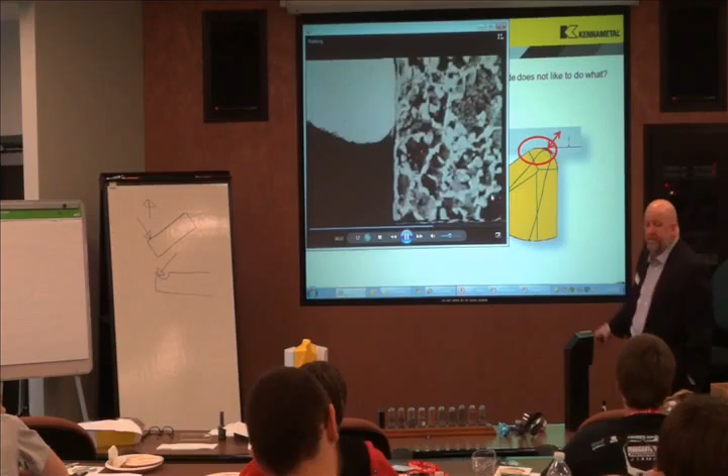Look what happens. Here's my cutting tool. Right here's my cutting tool. Here's my part. What am I doing here? Rubbing. Now, I want you to watch the structure, the crystalline structure of the material as it starts entering that rubbing zone. What's another word for that? Work hardening.

During the first Gulf War, we had M1 Abrams tanks flying across the Iraqi desert, and they were falling apart. The bolts were breaking. Two main reasons. One, they were using the wrong insert. They were using a partial profile threading insert. In other words, it had a sharp point when it should have had a radius at the root.

The second reason, they were taking spring passes. How many of you take spring passes or have heard that term? Goes past the zero pass. All you're doing is rubbing. Carbide likes to cut. If you're doing stainless steel or any kind of work hardening material, and you do spring passes or ghost passes, this is what you're doing. Between that sharp edge at the root and the work hardened surface, they were snapping off and breaking. Okay? Carbide likes to cut.

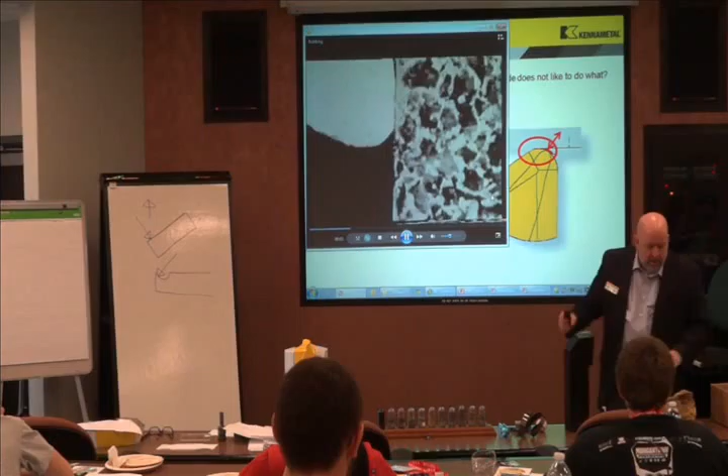Typically in the United States, we take a 10 thousandths finish pass. Me, myself, and I would never take below my nose radius. If it's a 32 thousandths nose radius, I take a 40 thousandths finish pass. And believe it or not, it's easier to control size.

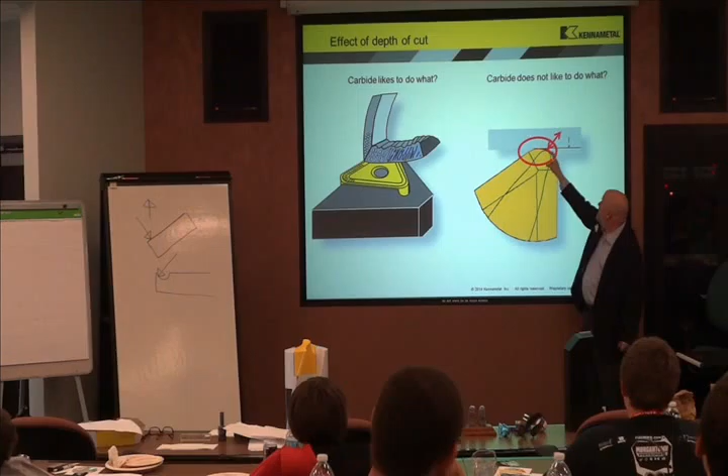How many of you run a manual machine? How many of you ever tried to sneak up on the dimension you're trying to get on that class project? Next thing you know, you go undersize on the last pass. The reason being, are machine tools perfectly rigid? No, they've got play. When I'm taking 100 thousandths or 150 or 200 thousandths roughing pass, I'm really putting that play to work. Then as I start doing successively smaller cuts, that pressure starts to change and get less. When I just take a nice little light cut, it sticks it. I don't have that force from that heavy depth of cut keeping them separated.

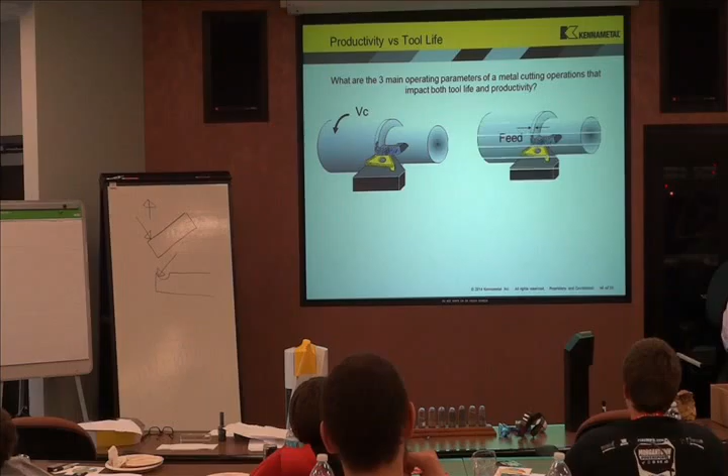Does it make sense? Isn't that really like your spring cut? You don't want a spring cut. That's my point. If I do a spring cut, I'm going to get this. Spring cut means I have to make two cuts. I don't want to make two cuts. I want to hold size, one rough pass, one finish. And if I did it my way, I'd just do one pass and finish it all at one time. The only reason I can't do that is sometimes the finish requirements won't let me. There are ways to get around that as well. Or the machine, I agree. I agree. But carbide likes to cut.

Here's the other thing. It changes the direction of my cutting forces. I've got a very, very thin chip because it feathers out around the nose. My tool's going to burn up a lot faster as well. I've got my cutting forces going in the wrong direction. I want them to go into the spindle instead of this way. I've got a very, very thin chip which is putting my heat in the part and in here instead of in the chip, because that chip feathers around that corner. It goes like this. I've got nowhere for the heat to go.

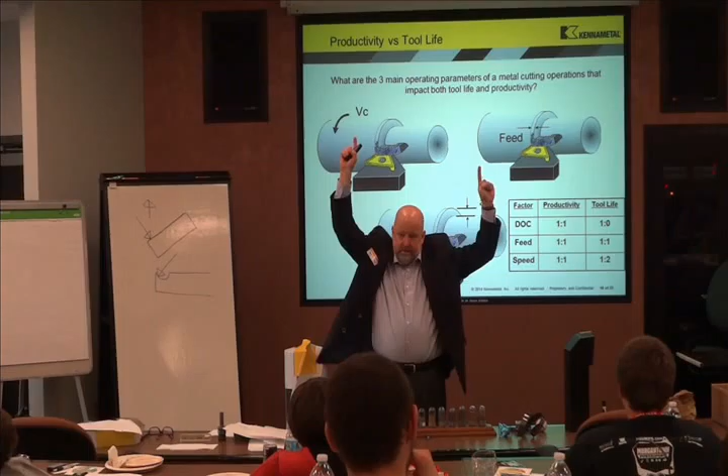Productivity versus tool life. A lot of people say they want their cake and eat it too. I'm one of those. You've only got 3 things to play with when it comes to tool life and productivity: speed, feed, and depth of cut.

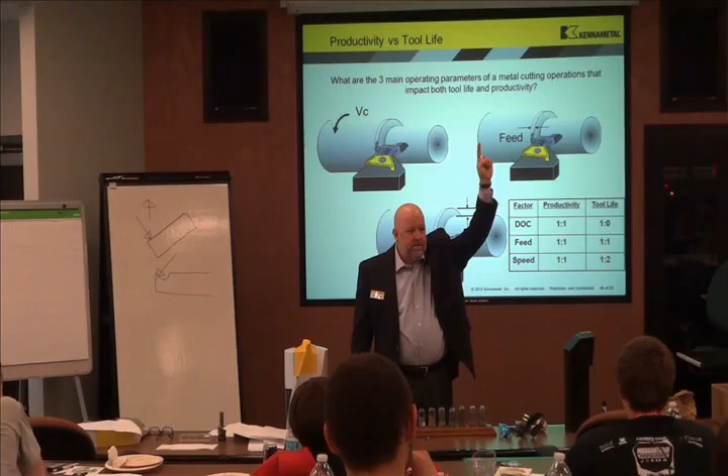Speed, feed, and depth of cut. When it comes to productivity, these are ratios - it's a 1-to-1 ratio. If I increase my speed, feed, or depth of cut 10%, what happens to my productivity? Does it go up or down? If I increase my speed 10%, productivity goes up 10%. Same's true for my feed rate - increase it 10%, productivity goes up 10%. Depth of cut 10%, productivity 10%.

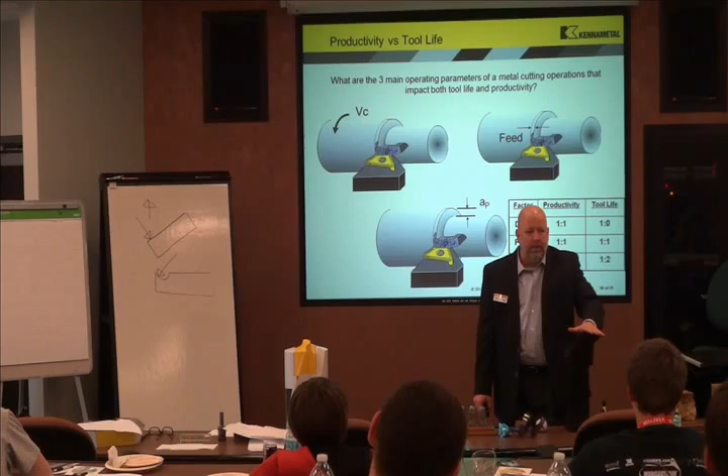Now let's look at tool life. As you notice, the ratios aren't the same. If I increase my depth of cut 100%, what happens to my tool life? It drops. Take a look at the ratio again - what's the ratio? It's 1 to 0.

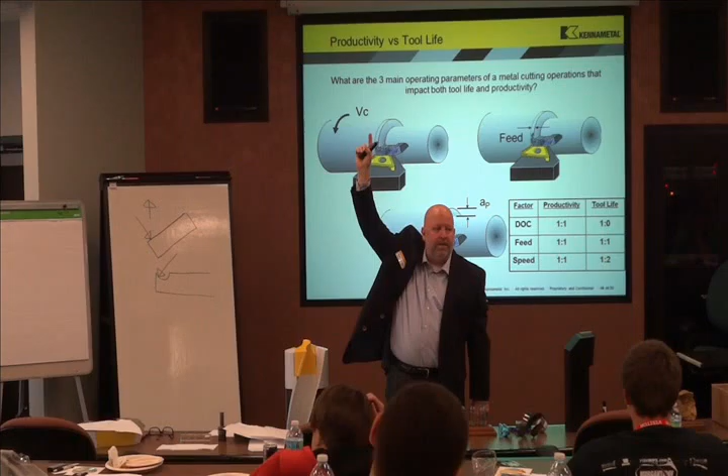Depth of cut is free. Once you reach a depth of cut 10 times your feed rate - so if my feed rate's 10 thousandths of an inch, once I reach a depth of cut of 100 thousandths - anything more doesn't cost me a dime in tool life. It just gives me productivity.

Depth of cut is free. Always maximize your depth of cut. If you have the rigidity of the part and of the machine, take as much as you can. Eliminate passes - it doesn't cost you a dime in tool life. When we're optimizing an operation, you always maximize the depth of cut first.

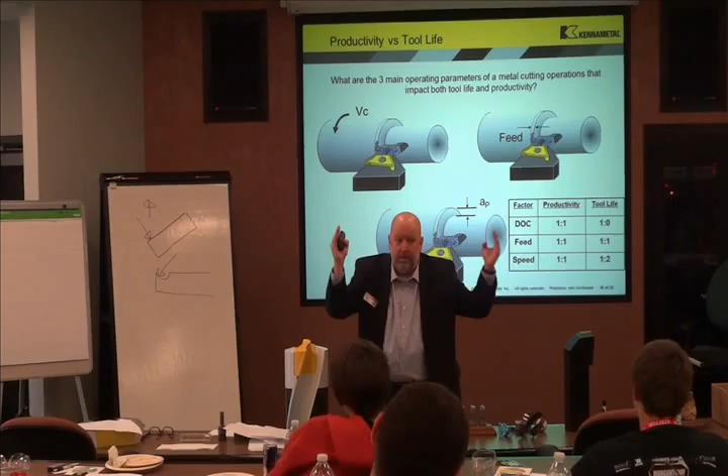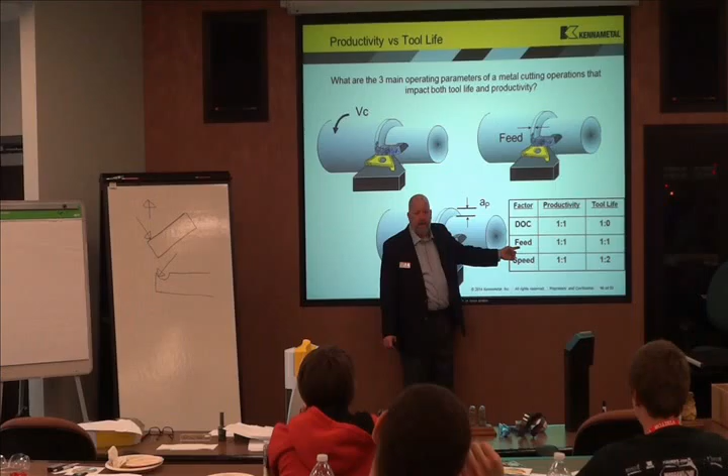Now, if I increase my feed rate 10%, look at the ratio on tool life - what do you think happens to my tool life? Does it go up or down? I'm generating more heat, so is it going to go up or down? It's going to go down. If I increase my feed rate 10%, my tool life goes down 10%. If I decrease my feed rate 10%, my tool life goes up 10%. It's opposite.

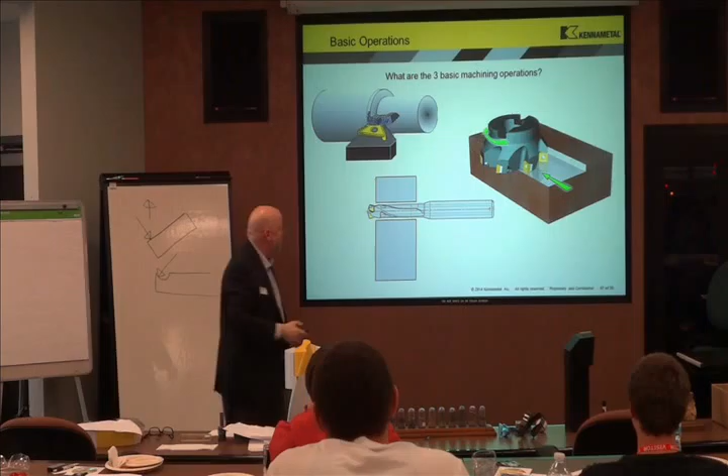Now when you look at speed, you always hear it - speed kills. Remember, we give you a surface footage in the book. I'm saying you're running within that surface footage. If you go below what we tell you in the book, that's like trying to jump out of a closed window - you're not in the window. You want to be within that window that we tell you in the book. But speed kills - I increase my speed 10%, my tool life goes down 20%.

So what you do always: take the maximum depth of cut first, take the maximum feed rate second, and then put the speed in the range that we give you in the book to where you get the tool life you want. That's how you optimize an operation - that's how you get the most for your cutting tool and the most out of your productivity.

There's 3 basic machining operations: turning, milling, hole making. I'm not going to get into those because you already do this for a living. How many of you actually have jobs doing this for a living? How many of the rest of you just do it at school? You had a job? Okay, I'm not going to get into this because you've seen it - you know what a Bridgeport is, you know what a lathe is, you know what a CNC lathe is, and you know what a manual milling machine is.

What 2 things does it take to make a chip? Heat and pressure. How do I control the heat? Speed. How do I control the pressure? What 3 elements are in carbide? Carbon, tungsten, and cobalt. What 2 do I combine to make the hard Rice Krispie, the wear-resistant particle? No - cobalt is the what?